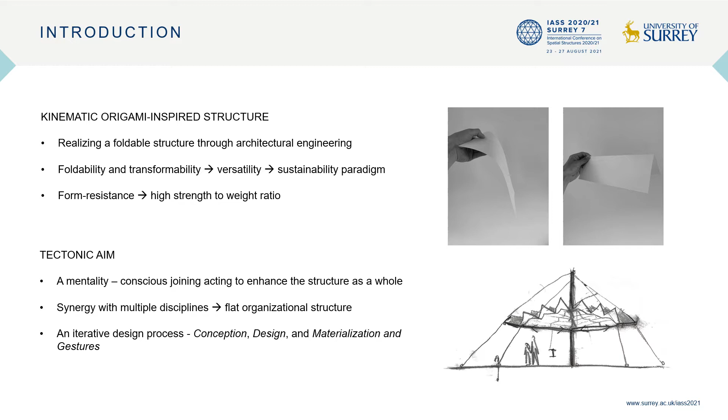Here is a midway sketch of the pavilion. And early in the process, it was chosen to go with a mast for the support. This was done to offer minimal distraction for the audience, but also, by the height, highlighting the existence of this roof.

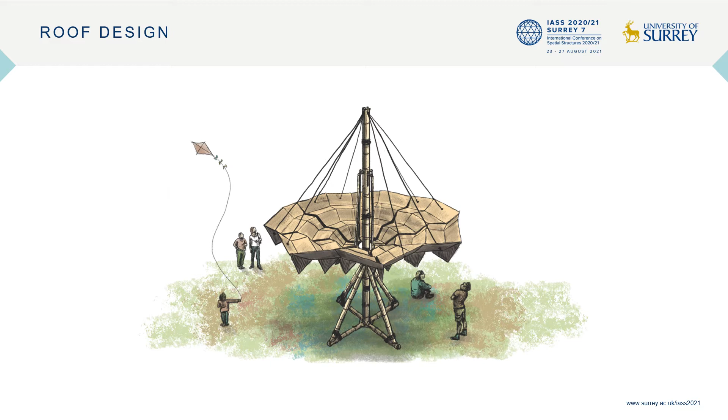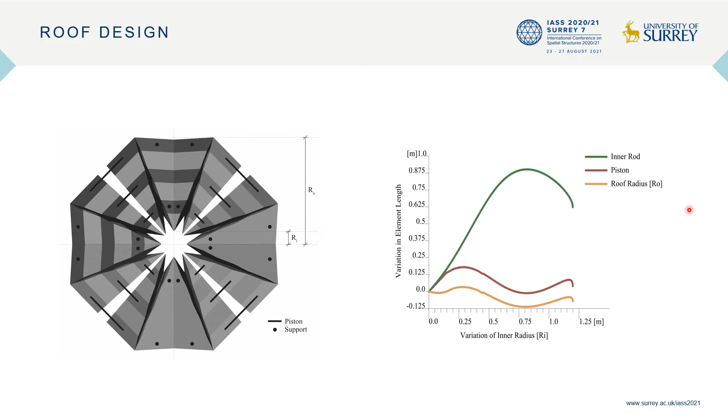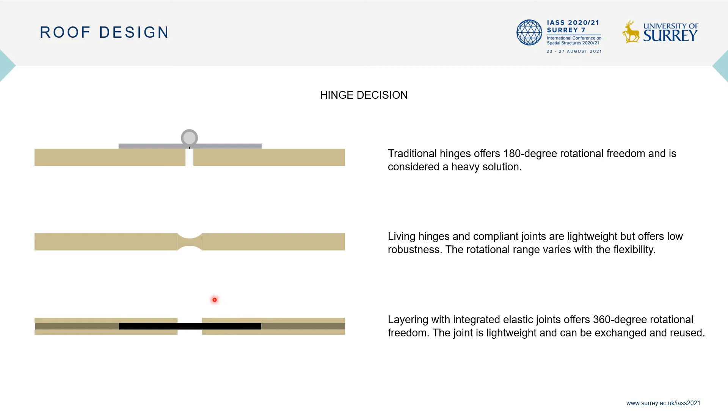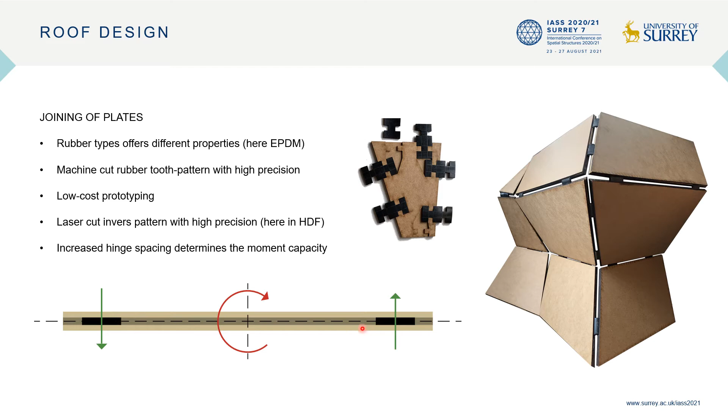The rubber joints are manufactured by machine cutting, and all the plates, including the inverse pattern in the middle layer, are done by laser cutting. This offers high precision and low production time. We've increased the spacing between the rubber joints where it was possible in order to increase the moment capacity of the system. Regarding the materials, plywood was chosen for the outer layers for its structural properties, and HDF, high density fiberboard, was chosen for the middle layer to get the structure as thin as possible.

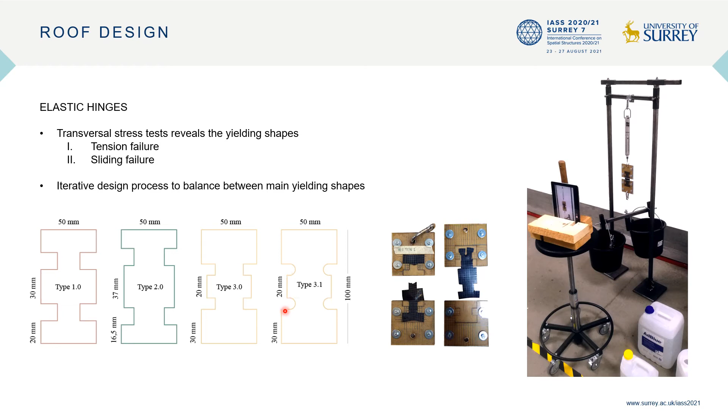The rubber hinges are tested in a transversal stress test, and we try to balance the shape between two yielding shapes. This one being a tension failure and this one being a sliding failure. You can see the iterative process down here and how the shape gets even more complex as we increase in iterations.

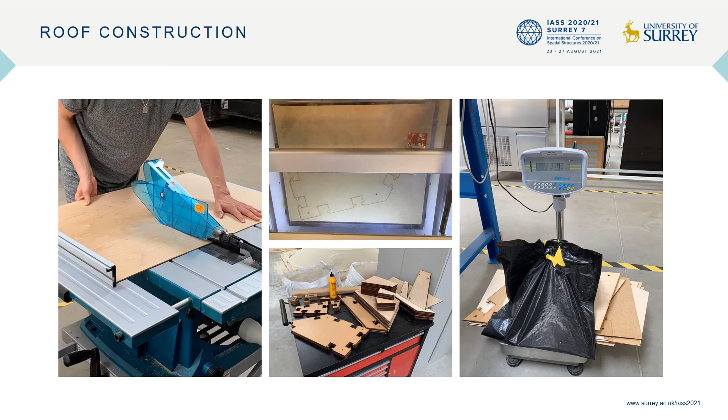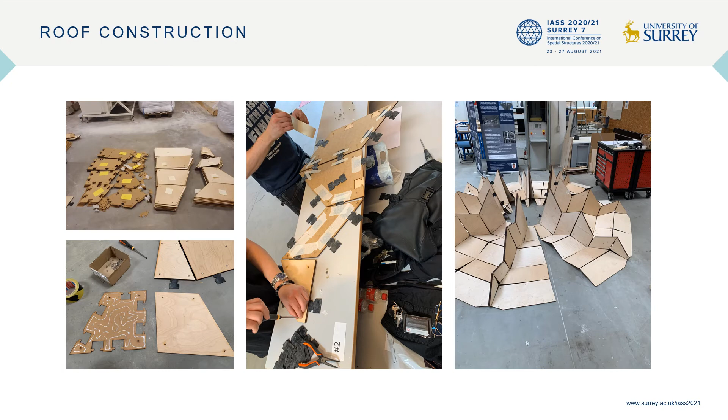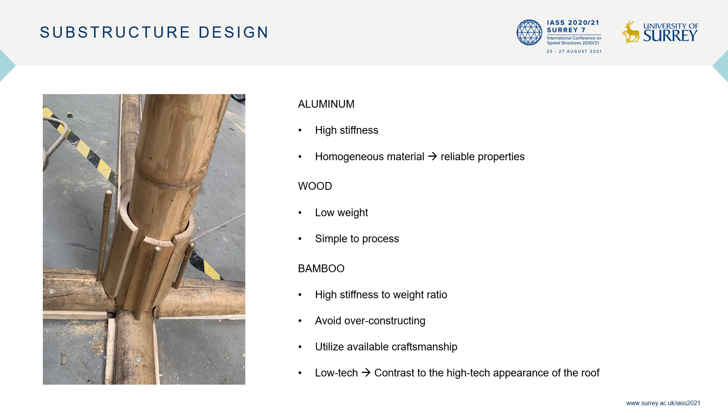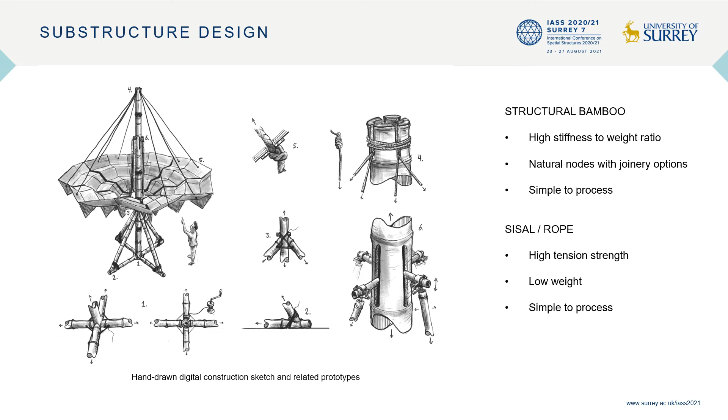Here is the first sketch of the joinery inspired from traditional bamboo crafting, and as you can see we've used sisal for tensioning in the system. This is then the final joinery, and as you can see here, this is how we section the bamboo so we can get short elements and still reach our height of 5 meters.

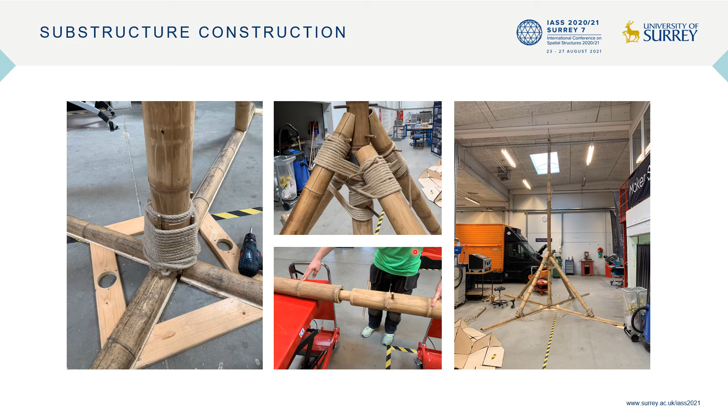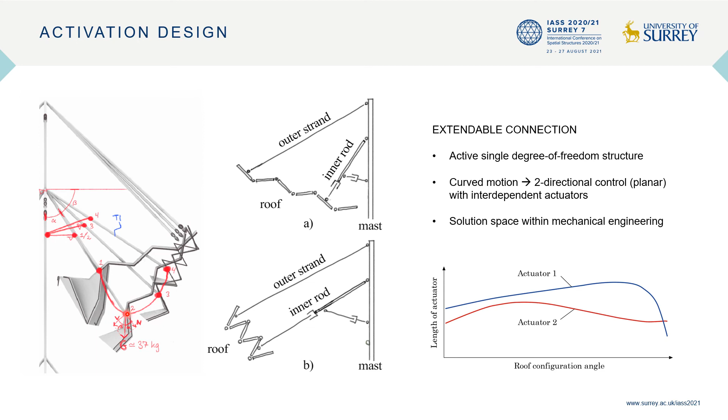The roof is a single degree of freedom kinematic structure, and the motion that you can see here is controlled by actuators. Interestingly, we need a two-directional control, so two actuators, and these work interdependently with different functions. This is because the motion of the roof is not linear, but actually curved. So at some point, one actuator is not enough because the roof motion will not need extension in that direction anymore.

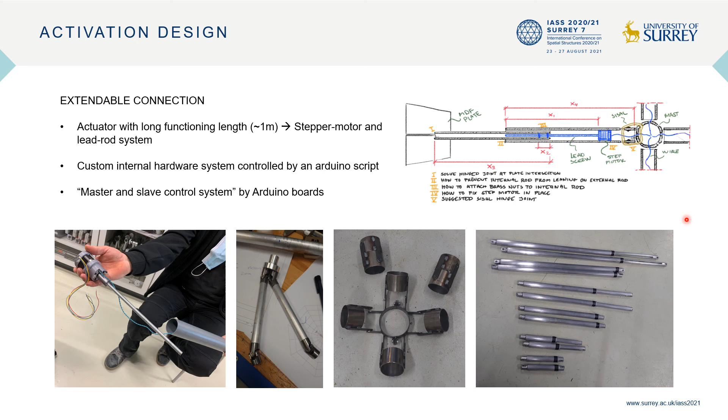The actuators, or extendable connections, were designed in collaboration with our technicians. They have a function length of approximately 1 meter, and it's a homebrewed actuator from stepper motors and lead screws. The hardware is controlled by an Arduino script, and this is in a sense a master and slave system, where one master Arduino board is keeping track of all the slaves, being the Arduino boards for each stepper motor. Here are some photos of the joinery that was made for this.

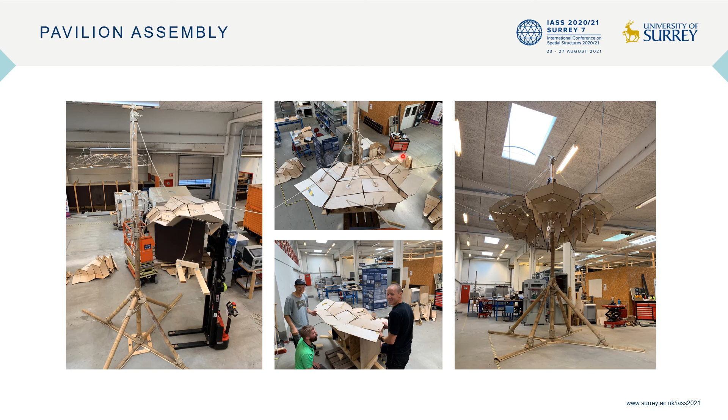Here you can see some process pictures from the assembly. We've made this scaffolding which allows us to raise the roof quarters and fixate them temporarily while the others are mounted. Here you get a vertical pan of the pavilion at its current stage.